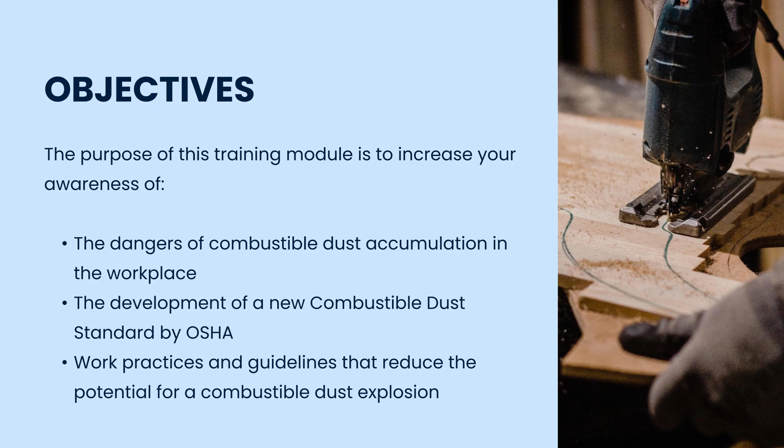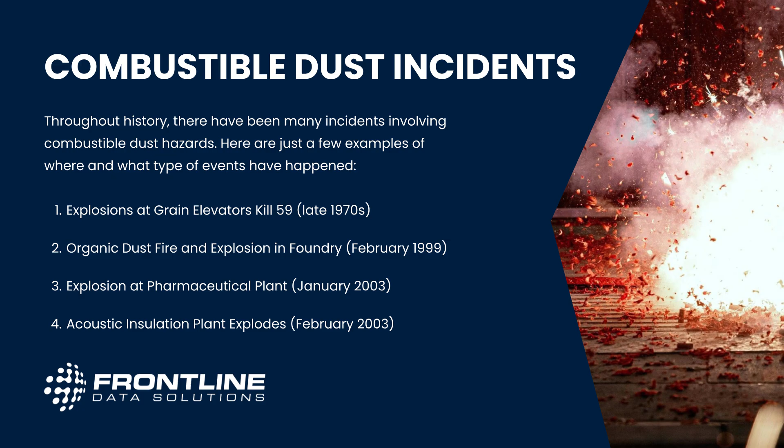Combustible dust incidents are not rare or isolated events. They've occurred across multiple industries over several decades. From grain elevator explosions in the 1970s to fires and explosions in foundries, pharmaceutical plants, and insulation facilities, these incidents have resulted in significant loss of life and property damage. These examples highlight how widespread and serious this hazard can be when not properly controlled.

In recent years, combustible dust explosions have drawn increased attention from regulators and industry leaders, especially after major incidents like the 2008 sugar refinery explosion. While OSHA does not yet have a single comprehensive standard specific to combustible dust, employers are still responsible under the General Duty Clause to maintain a workplace free from recognized hazards.

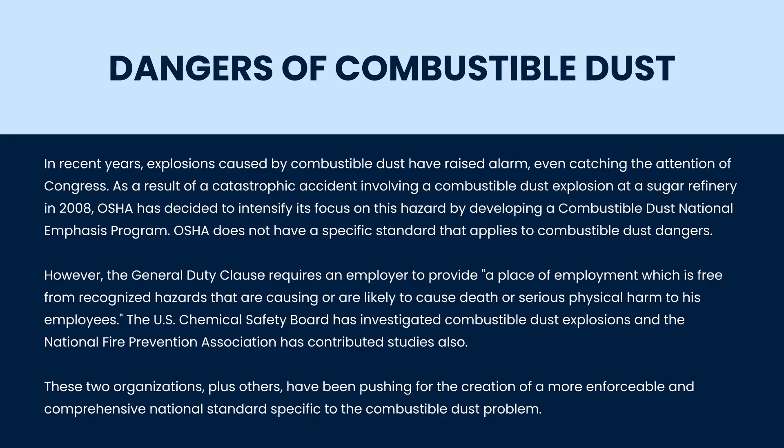Organizations like the Chemical Safety Board and NFPA have continued to push for stronger, more defined standards to address this risk. The National Fire Protection Association, or NFPA, plays a key role in providing guidance on combustible dust hazards. While NFPA standards are not OSHA regulations, they offer widely accepted best practices for preventing fires and explosions.

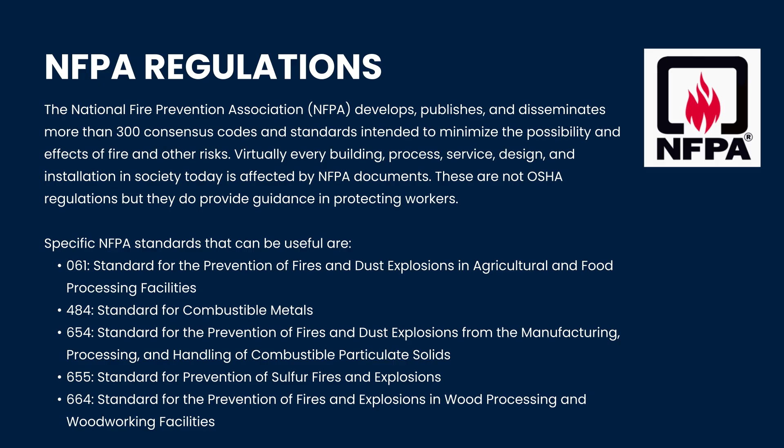Several specific standards apply to different industries, including agriculture, metal processing, manufacturing, sulfur handling, and woodworking. These standards provide a framework for designing safer processes and facilities.

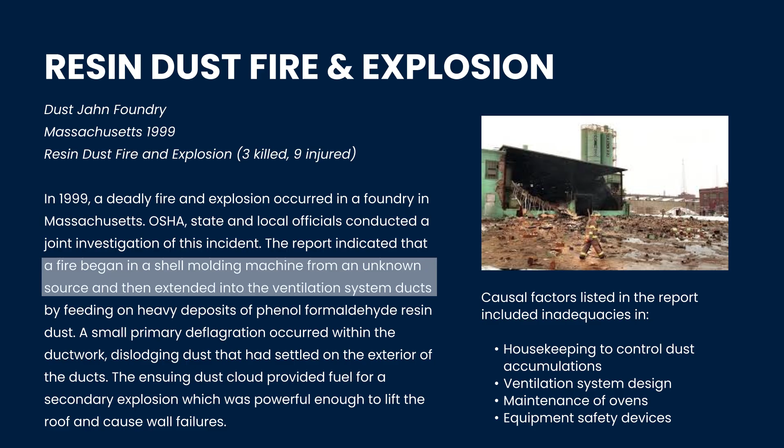A 1999 incident at a foundry in Massachusetts demonstrates how quickly a combustible dust hazard can escalate. A fire started in equipment and spread into ventilation ducts where dust had accumulated. This led to a primary explosion, which then triggered a much larger secondary explosion when additional dust was dispersed into the air. The blast caused severe structural damage, highlighting how dangerous accumulated dust can become when disturbed.

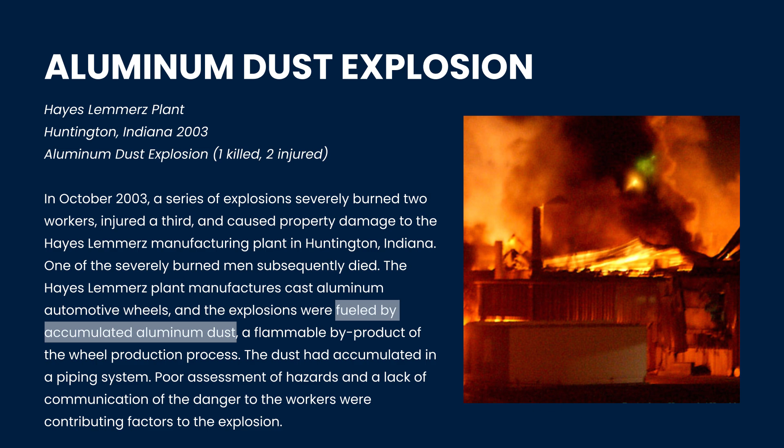In 2003, an aluminum dust explosion at a manufacturing plant in Indiana caused serious injuries and a fatality. The explosion was fueled by accumulated dust inside a piping system. Investigators found that poor hazard assessment and lack of communication about the risks played a major role. This case reinforces how critical it is to recognize dust hazards and ensure workers understand the dangers.

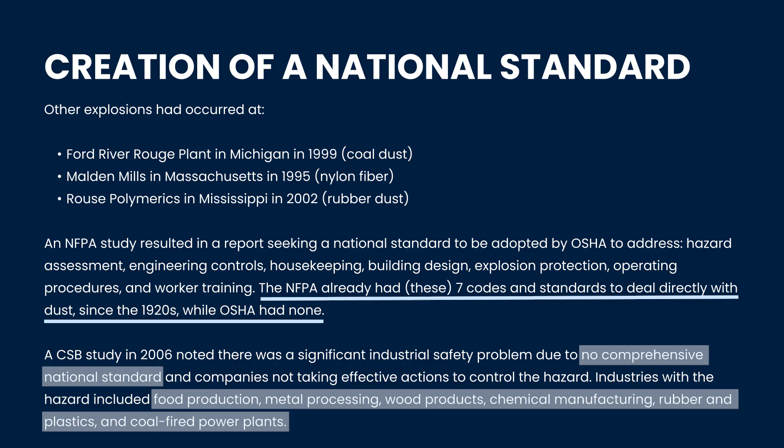Multiple combustible dust incidents across different industries, ranging from coal and nylon to rubber dust, have exposed gaps in regulatory coverage. Studies from organizations like NFPA and the Chemical Safety Board have emphasized the need for a comprehensive national standard. These reports identified key areas for improvement, including hazard assessments, engineering controls, housekeeping practices, and worker training.

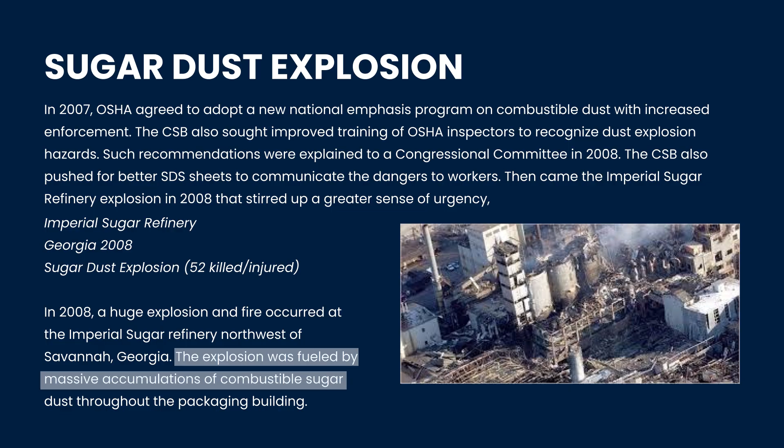The 2008 explosion at the Imperial Sugar Refinery in Georgia became a turning point in combustible dust awareness. Massive dust accumulation throughout the facility created conditions for a devastating explosion and fire, resulting in dozens of casualties. This event accelerated regulatory focus and highlighted how quickly combustible dust can become catastrophic when allowed to build up unchecked.

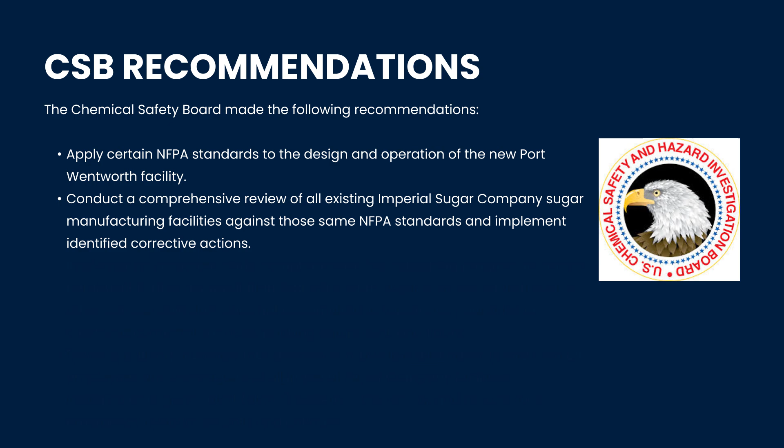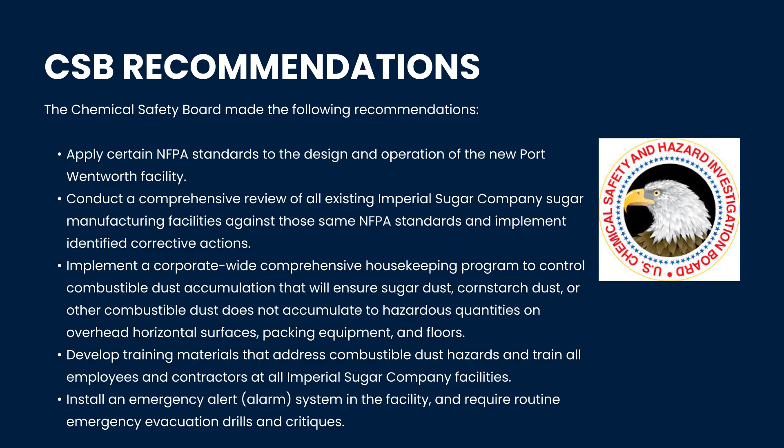Following the Imperial Sugar incident, the Chemical Safety Board issued several key recommendations. These included aligning facility design and operations with NFPA standards, conducting comprehensive safety reviews across all facilities, implementing strong housekeeping programs to control dust accumulation, improving employee training, and installing emergency alert systems. These actions are all aimed at preventing similar incidents in the future.

Combustible dust includes fine particles like flour, wood dust, or coal that can ignite when suspended in air. When these particles become airborne in a confined space and encounter an ignition source, an explosion can occur. What makes this hazard especially dangerous is the potential for secondary explosions. An initial blast can disturb dust that has settled on surfaces, creating a larger dust cloud that fuels an even more powerful explosion. Even small amounts of accumulated dust, spread across a relatively small area, can create serious risk.

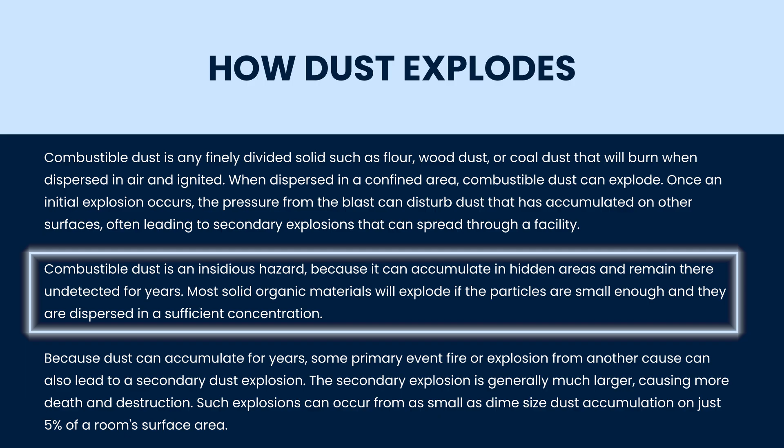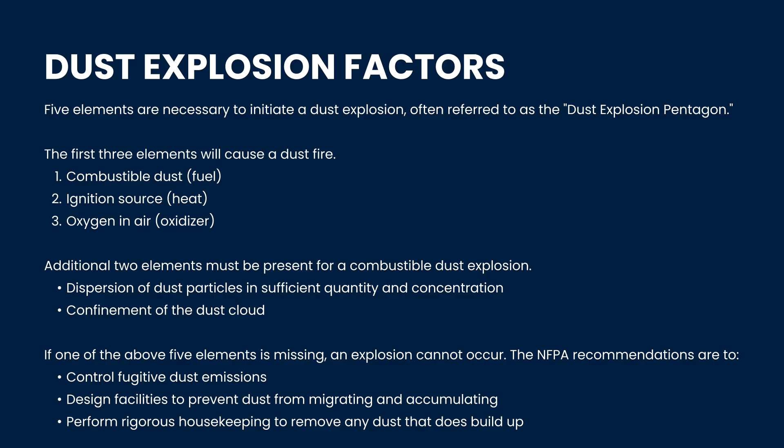A dust explosion requires 5 elements, often referred to as the dust explosion pentagon. The first three, fuel, oxygen, and an ignition source, are enough to start a fire. For an explosion to occur, two additional conditions must be present. The dust must be dispersed in the air at the right concentration, and it must be confined. If any one of these elements is removed, an explosion cannot happen. That's why prevention efforts focus on controlling dust accumulation, eliminating ignition sources, and designing facilities to limit dispersion and confinement.

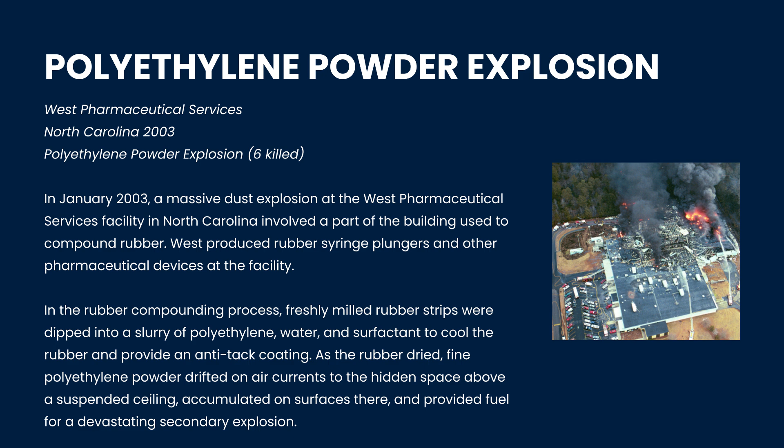In 2003, a devastating explosion occurred at a pharmaceutical manufacturing facility in North Carolina. The process used fine polyethylene powder, which became airborne and accumulated in hidden spaces above a suspended ceiling. Over time, this dust built up unnoticed and eventually fueled a powerful secondary explosion. This incident highlights how dust can migrate beyond visible work areas and accumulate in places that are easy to overlook.

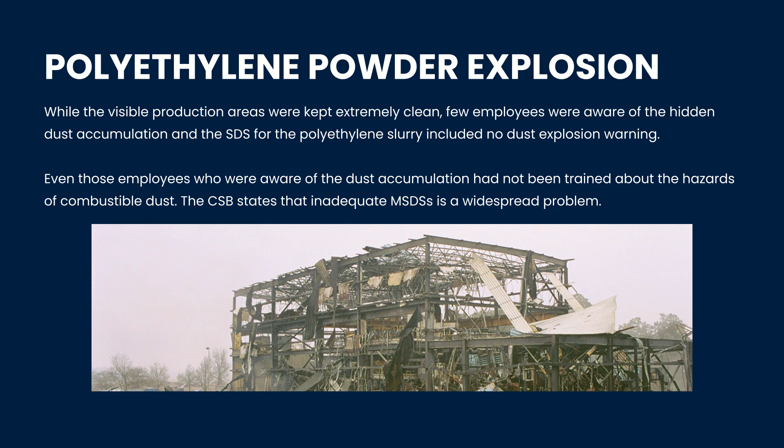Despite clean production areas, the facility had a critical blind spot: hidden dust accumulation. Many employees were unaware of the buildup, and safety data sheets failed to clearly communicate the explosion risk. Even those who recognized the presence of dust had not received proper training on its hazards. This case demonstrates how gaps in communication, training, and hazard awareness can allow serious risks to go unaddressed.

Another tragic incident occurred in 2003 at a manufacturing plant in Kentucky that produced fiberglass insulation. Resin dust accumulated in a production area and was likely ignited by flames from malfunctioning equipment. The resulting explosion and fire caused multiple fatalities and extensive damage. This example shows how equipment failures combined with dust accumulation can quickly escalate into a catastrophic event.

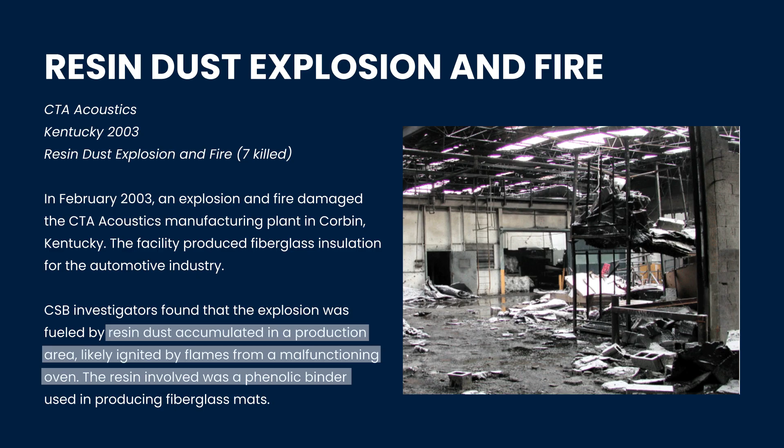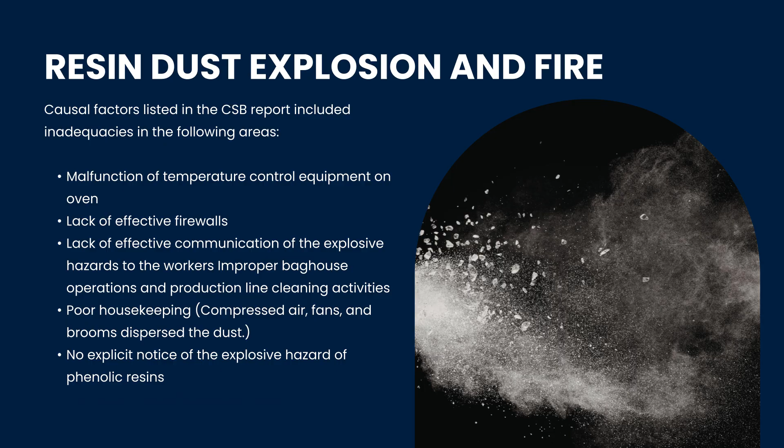Investigators identified several contributing factors in this incident. These included equipment malfunctions, lack of fire barriers, poor communication of hazards, and ineffective dust control practices. In addition, cleaning methods such as compressed air and sweeping actually spread dust into the air, increasing the explosion risk. The absence of clear hazard warnings and inadequate inspection practices further compounded the problem.

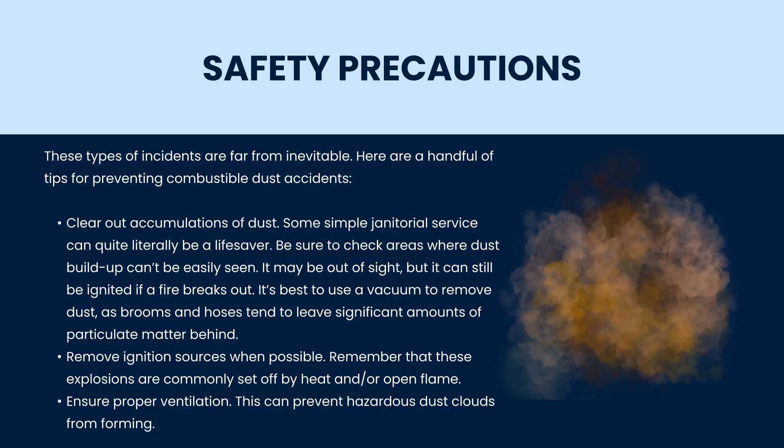Preventing combustible dust incidents starts with simple but consistent safety practices. Regular housekeeping is critical. Dust should be removed using proper vacuum systems rather than methods that disperse particles into the air. Ignition sources, such as heat or open flames, should be eliminated whenever possible. Proper ventilation is also essential to prevent dust from becoming airborne and forming hazardous concentrations. These basic controls can significantly reduce risk when applied consistently.

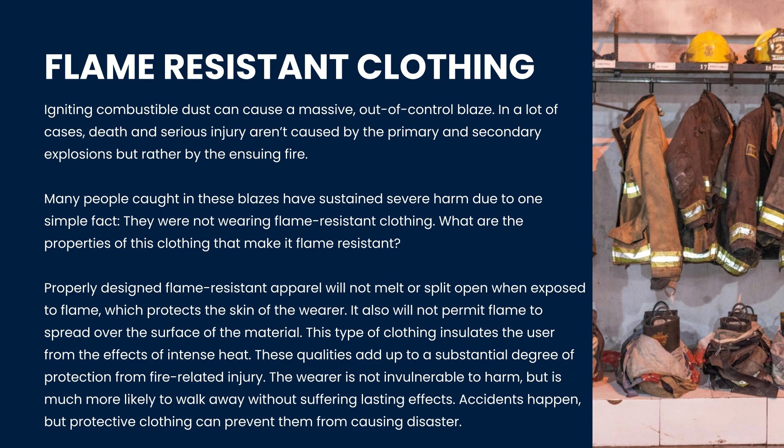In many dust-related incidents, the most severe injuries occur not from the explosion itself, but from the resulting fire. Flame-resistant clothing provides an important layer of protection. This type of clothing is designed not to ignite easily, melt, or allow flames to spread across its surface. It also helps insulate the wearer from extreme heat. While it doesn't eliminate risk entirely, it greatly increases the chances of avoiding serious injury.

Facilities that handle combustible dust must carefully evaluate electrical systems. Certain areas may require specialized equipment designed for hazardous environments. OSHA provides general requirements for electrical safety, while detailed guidance is found in the National Electrical Code and NFPA standards. Proper classification ensures that electrical systems do not become ignition sources in areas where dust may be present.

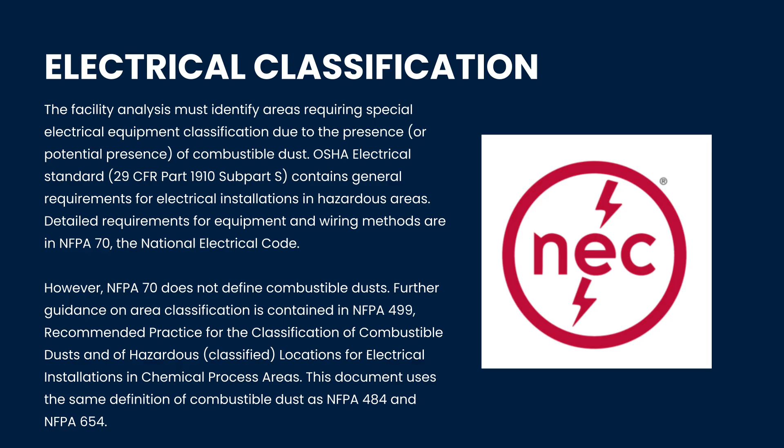Combustible dust hazards are categorized under Class II electrical classifications. These are further divided into groups based on the type of dust, such as metal dust, carbon-based dust, or other materials. Each type has unique properties. For example, some dusts can conduct electricity and create short circuits or sparks. Understanding these classifications helps ensure that the right equipment and controls are used in hazardous areas.

Effective dust control is one of the most important aspects of prevention. NFPA guidelines recommend minimizing dust escape from equipment, using proper collection systems, and designing surfaces that are easy to clean. Hidden areas must be accessible for inspection, and facilities should implement formal programs for dust monitoring, cleaning, and maintenance. These programs should be documented and consistently followed.

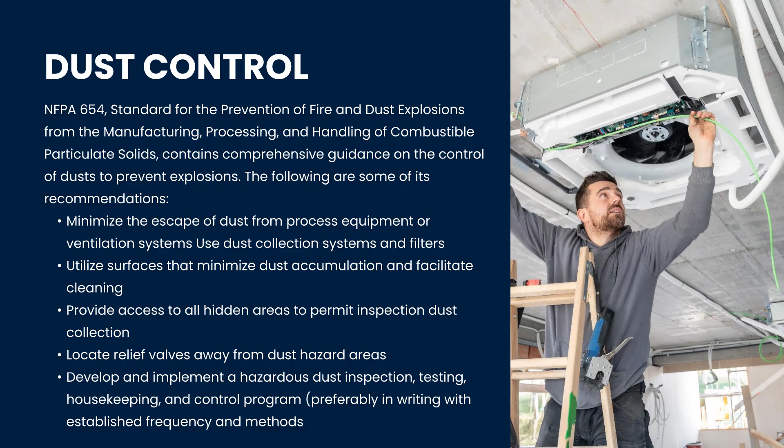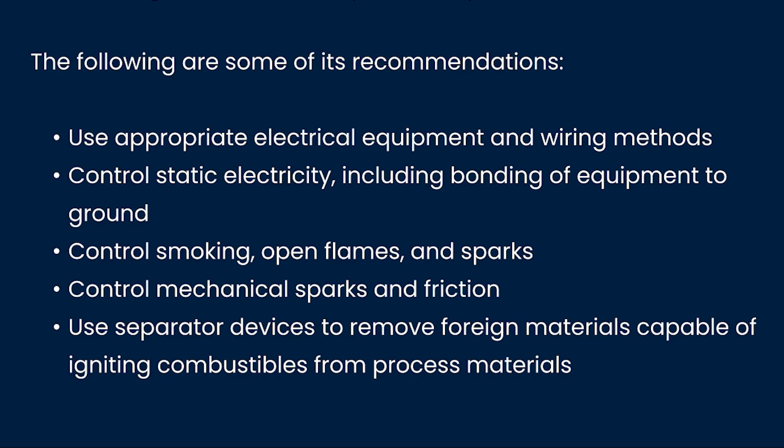Controlling ignition sources is just as important as controlling dust. This includes using appropriate electrical equipment, grounding systems to prevent static buildup, and restricting open flames or smoking. Mechanical sparks and friction must also be managed, and systems should be in place to remove foreign materials that could ignite combustible dust. These controls reduce the likelihood that a dust cloud will encounter an ignition source.

Employees play a critical role in preventing combustible dust incidents. Workers who understand the risks are more likely to recognize unsafe conditions and take action. Training should cover both specific job tasks and overall facility safety programs. It should be provided before work begins, refreshed regularly, and updated when processes change. Employers must also comply with hazard communication requirements, including labeling, safety data sheets, and proper training.

Management teams are responsible for establishing and maintaining effective safety programs. This includes conducting facility assessments, identifying hazards, and implementing prevention strategies tailored to their operations. Supervisors must actively support dust control and ignition prevention efforts, encourage reporting of unsafe conditions, and ensure that corrective actions are taken promptly.

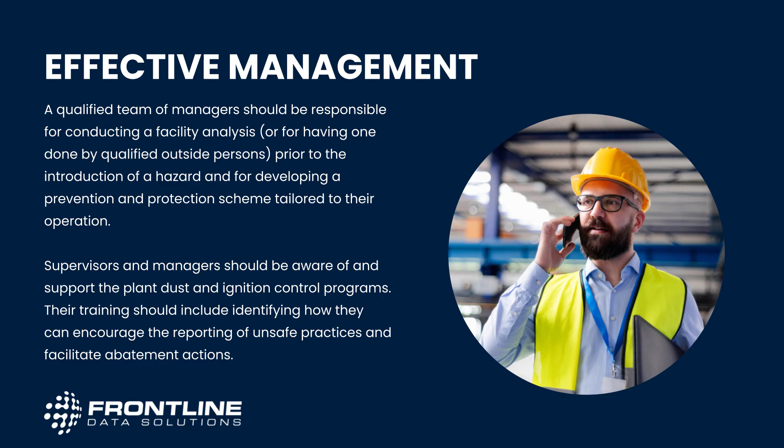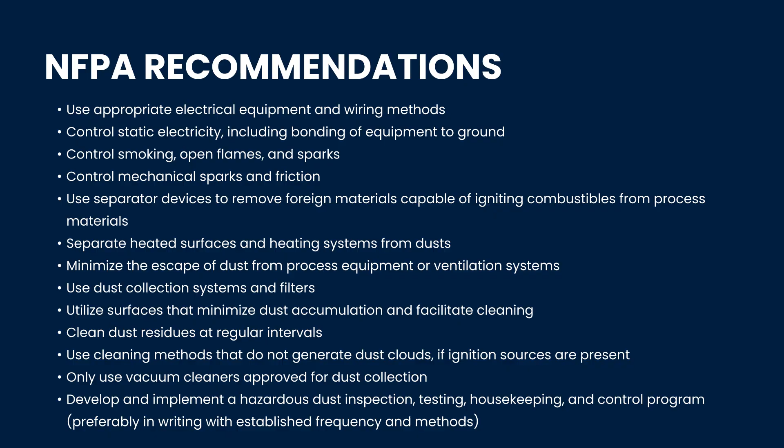Dust explosions can have devastating consequences, including structural damage, severe injuries, and loss of life. Workers may be exposed to intense heat, flying debris, and collapsing structures. These incidents often happen quickly and without warning, making prevention the most effective form of protection.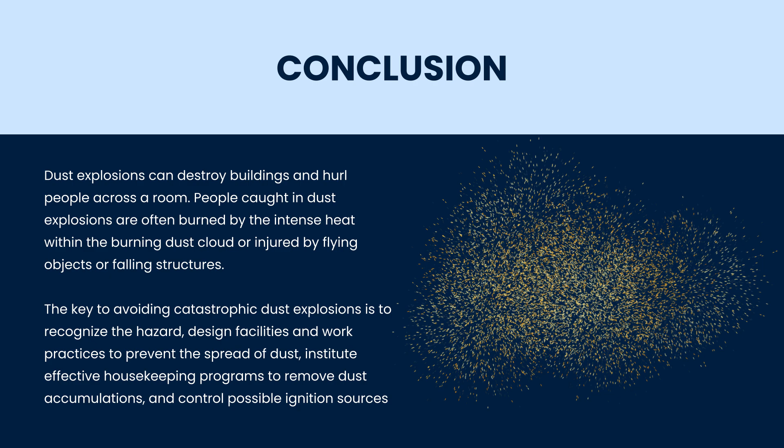One of the biggest challenges with combustible dust is that it is often underestimated. While past incidents led to targeted standards in specific industries, broader regulation is still evolving. OSHA has been working toward a more comprehensive standard, but in the meantime, organizations must rely on existing guidance and best practices to manage risk.